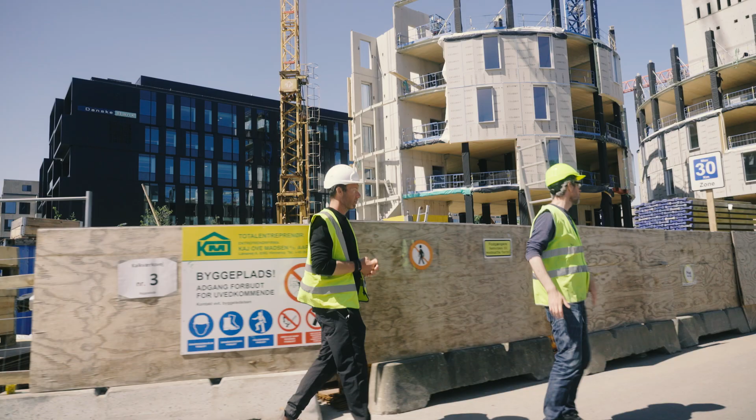Today, what are we going to take a look at? Today we are going to open our minds and hearts and embrace concrete. We're going to talk about how you use concrete for the most important parts of the building, and how you always think about bringing down the amount of concrete used.

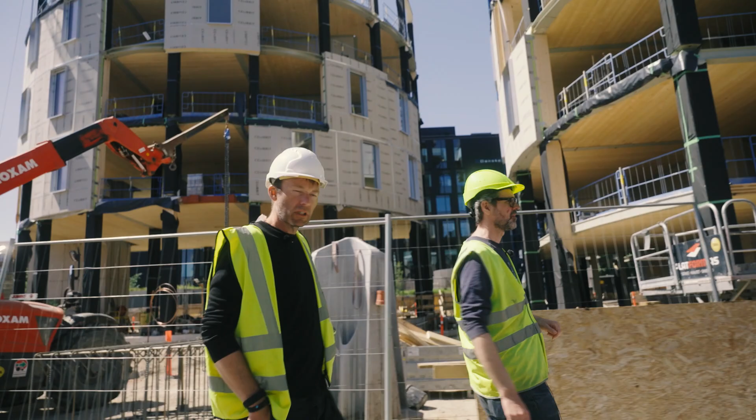Just a quick recap for the audience out there: why do we not like concrete, Anders? We don't like concrete because it stands for 8% of the total CO2 emissions globally. It's a big sinner. It uses so much energy to create cement, and that's a huge problem.

The other thing is that to make concrete, we are draining the oceans for sand, because it needs rough sand instead of round sand. People always think, why don't you take sand from the Sahara? We can't use that because it's too round—it's been rounded. Another issue is that the specific stones used for hard concrete are imported from Scotland or the north of Norway, not locally harvested. So there are many problems with that.

But let's go in and see how far we can go.

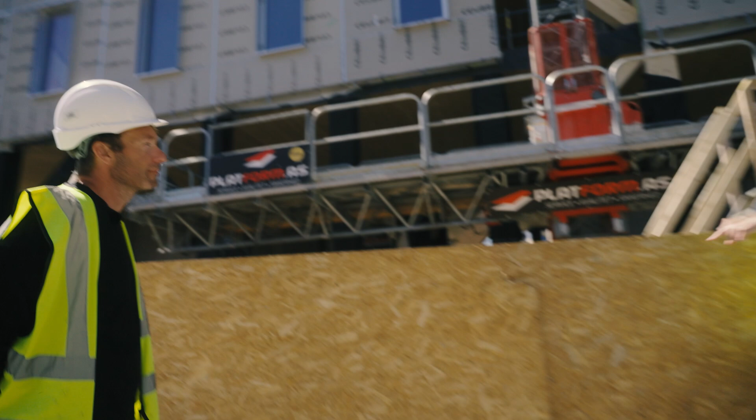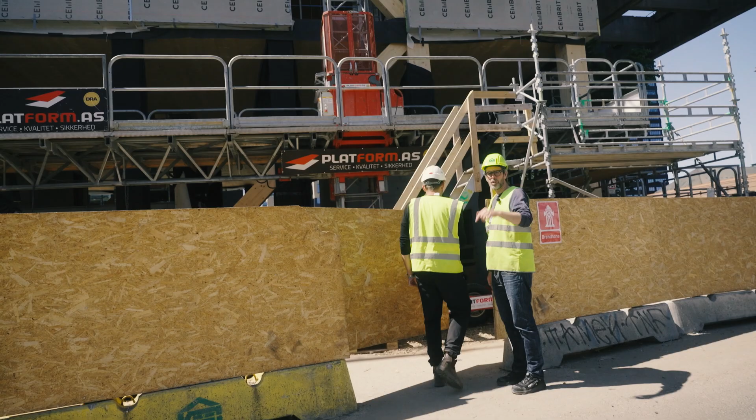I think you need to find a door. No, part of the problem is that we can't get in—there's no handle. Who would ever make a door without a handle? Do you consider a handle? It's an imaginary handle, you have to use your mind. The most sustainable architect in the world made a door—a sustainable door handle, the one that's never been built. Look at this! You are so clever, no handle here, not necessary, because the handle is over here. It must have been an engineer thinking that saves 50% CO2 emissions. Brilliant. Cut. Thank you. Only use a handle on one side, if not necessary.

So that's a way of talking about concrete in a positive way.

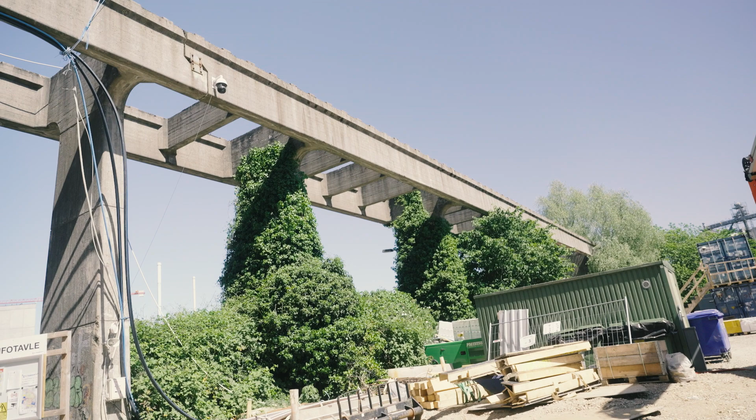Here, just next to the building, there's the coal crane—there's an old coal crane track from when this was an industrial area. The best thing about concrete is if you can directly reuse it. So this is going to be a bridge, and we are recycling all the concrete elements here. That's a fantastic possibility—it can be directly reused.

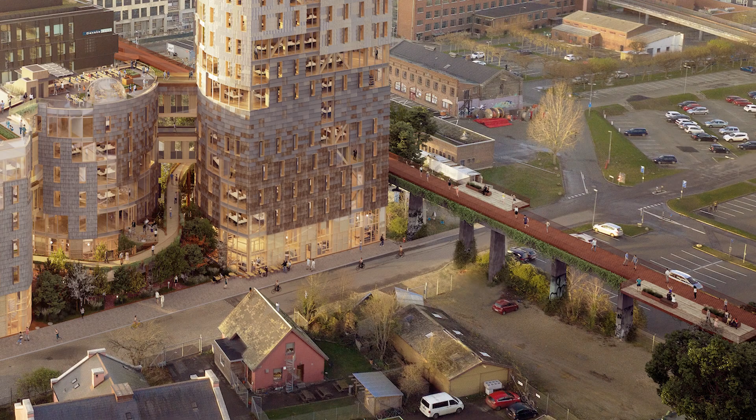And you actually won that assignment 7 years ago. 7 years ago we won that with a larger team. And you didn't know at that point that you were going to build this house? No. Life—life connects.

Okay guys, so we walk into this beautiful, wonderful building. So the first thing you did to try to minimize concrete, what was that?

Is that a helping finger? That's my helping finger, that's my pointing finger. So the audience doesn't notice that I'm trying to help you.

One thing we did to reduce the use of concrete in the building was to have no basement. Usually we dig the whole site out and cast a lot of concrete. Instead, we had no basement, no parking—we only have a small basement for bicycles.

So what we have to look at today is a different way to use concrete, or a new way that we are using concrete. Since concrete stands for 8% of total CO2 emissions, of course we need to find solutions.

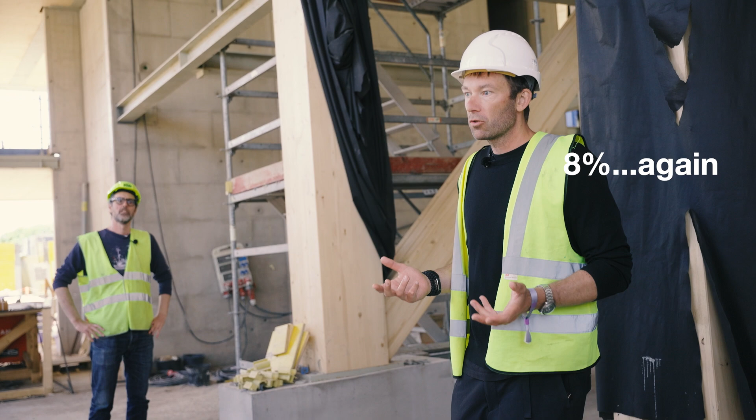One way of finding solutions is to make more sustainable concrete. But the first solution is to minimize the use of concrete. But we said that. Yeah, but we're saying it again.

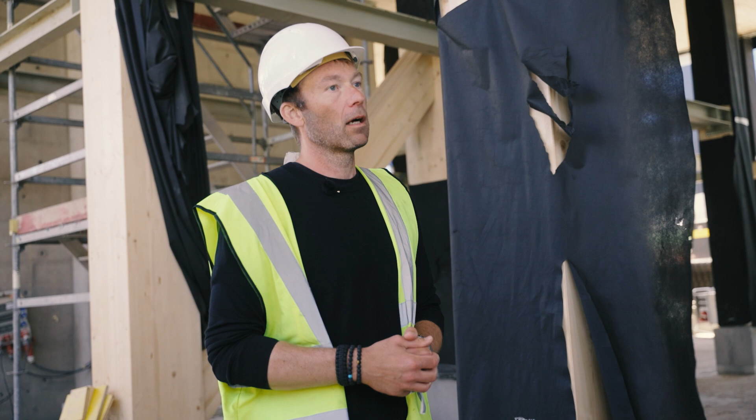So now let's go up and look at the top floors that are actually being cast right now. Dry cast? No, in situ cast. In situ cast, yeah—of course that's what it's called.

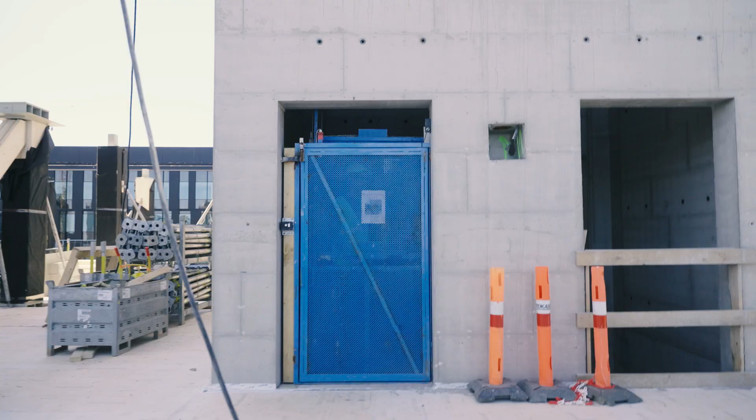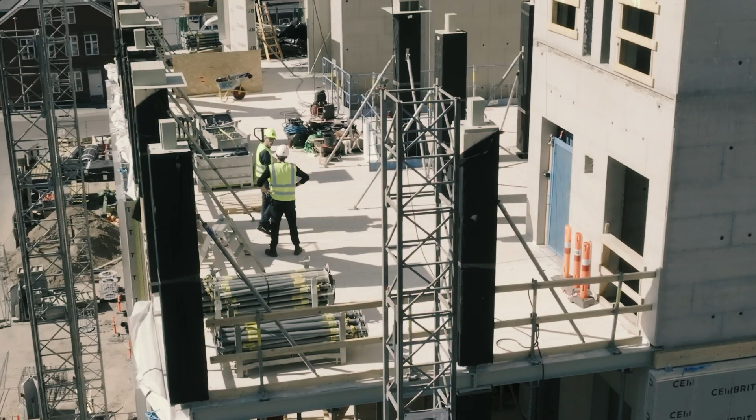So I don't know if you know it, Anders, but I used to do a lot of weightlifting. No, children's television. Nearly the same. Same, but different. Maybe we should start by looking at somebody else's way of building the old way.

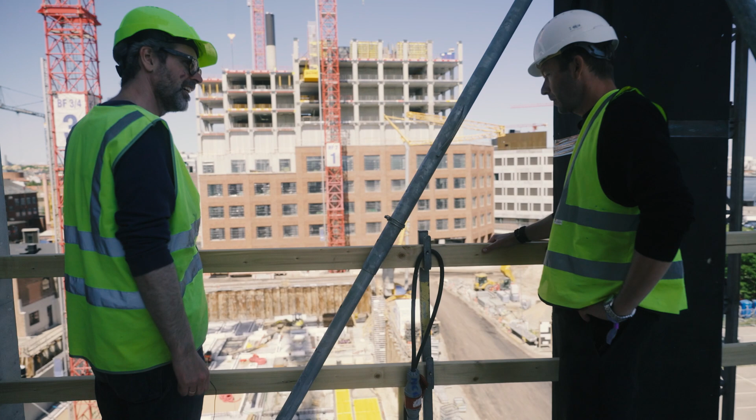Okay, so this, actually, it's a nice view. So what we're looking at here... Are you not completely afraid of heights? I'm a little bit afraid of heights, or a lot actually. Okay, I'm just gonna stay in here.

So what we're looking at here is a traditional dugout basement, which could be various depths, 2-level, 3-level, whatever. What happens that is not so good is that you dig out a lot of dirt and mud, and then you drive it away. There's a lot of truck driving to get rid of it. And then you hammer these steel walls in, which is really intensive in steel and CO2 emissions to create.

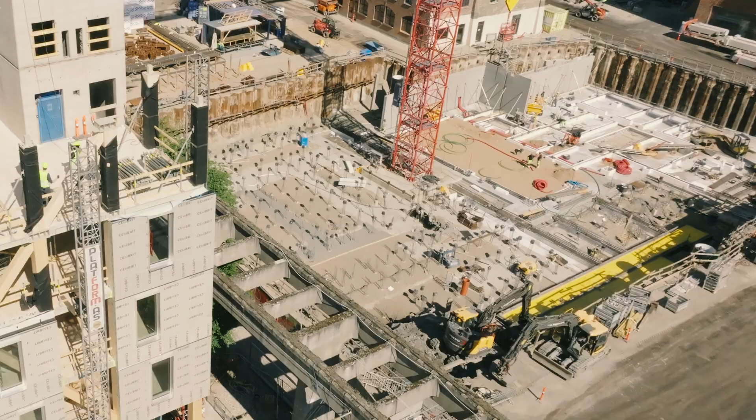So you're already in the negative, and we're not even starting to use concrete yet. This is actually really incredible that when we calculate CO2 with life cycle assessment, these two things, the steel walls and the removal of all this dirt, are not calculated in.

Where the calculations actually start is when we then have to prepare the concrete. And in that there is of course all the arming of the steel in the concrete, which we can see over there as well. The arming meaning all the steel rods that you bind together, so the cement has something to cling onto, so it can take the load. Okay, this is actually a bit unstable. Yeah, it's not so good.

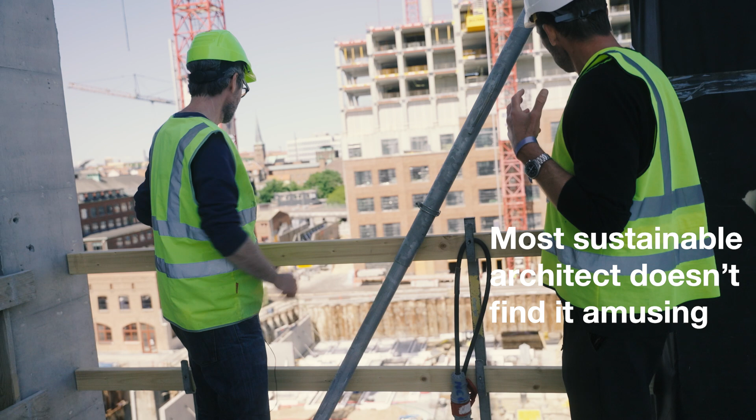Okay, but then you start to fill up the basement with concrete, and of course that is enormous amounts of volume you put in. Both the base, which needs a big deep anchor if you make a high building, so you start to use a lot of concrete there. And that's of course a super big challenge.

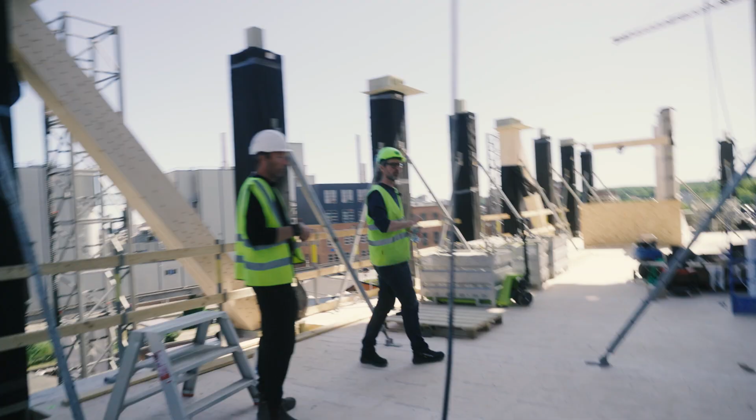The site that you choose to build on has an impact on sustainability immediately. And where we're actually building now is on a beach. This used to be the beach, and then it was claimed as an industrial area, and now after that we are making it into a new kind of office or residential area. So the foundation is basically on sand.

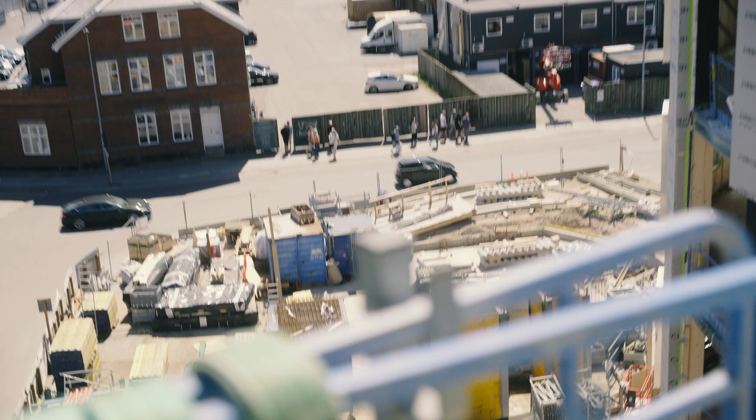Can we see some of the foundation points down over here, those squares down there? Yes, those are the anchoring points on this building. Now you can see where the containers are over there, that's the footprint of the third building. The interesting part here is that the buildings that are 6 floors high, and this building that's 20 floors high, have nearly the same amount of pillars, which is interesting looking at how many more square meters we're actually building, even though we're up high with a light building compared to a heavy building.

Let's get some comparison. Now we saw a traditional way of doing it compared to this one. The amount of concrete for foundation, what is that? What you can see here is that we've not dug out, well, we removed earth, but like a couple of meters or not even, 1.5 meters, something like that.

And then we put these vertical pillars in, and after that, cast a platform. You can see that there aren't these steel walls around here. No, so we didn't have to go down, and it's a retaining wall for the dirt that you don't need. It doesn't expand because the weight of this building is much lower than the one over there. So that's a very, very big difference where we don't use that much concrete.

What we've also tried to do here is that the concrete company, Aalborg Portland, has developed a new type of concrete that reduces the amount of CO2 in the cement production.

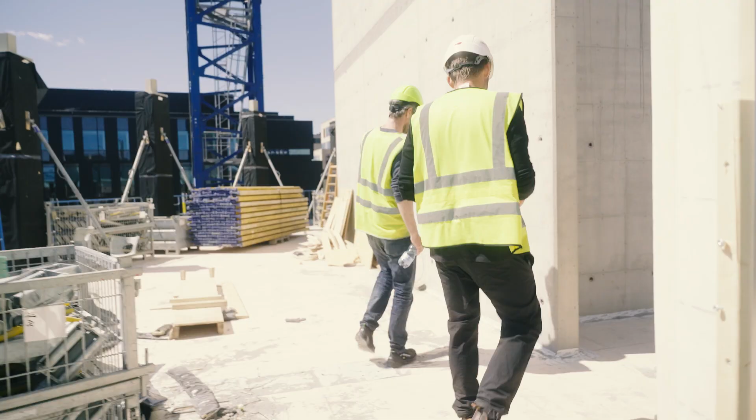Is that the same cement we have there as the one we have over here? Yes. So in building, there's two ways of building with concrete. In Denmark, typically we do elements. That means the columns on the side and the columns around the slabs are built up in a factory, then driven from the factory and assembled on site.

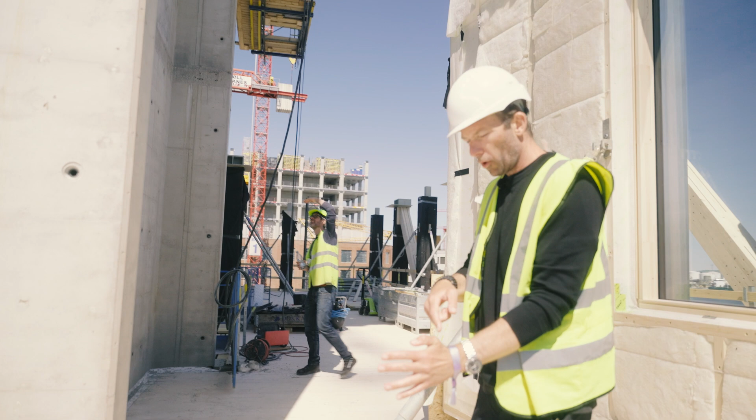And why didn't you do that with this one? There's different reasons for that. Here we have this form that's able to move up, almost like scaffolding on a rail or a train, where the whole top part can be moved up and follow the casting of the building. So instead of craning elements in, you start from the bottom, pour into the same form, lift the form up, and pour more. That's how you keep going.

But what is the advantage of that? Do they need more concrete to do that, or is it different? In some situations, in-situ cast in place makes it easier to optimize for the use of that part of the building. Where an element's advantage is that you do the same element many times, that also means it needs to be optimized for all purposes instead of being customized for that specific situation.

But for us here, we also have an aesthetic thing, that in-situ casted is a more beautiful form and shape, where you don't have joints. If it's an element, you start to have joints, and these seams are not very beautiful. So here we get a full casted wall and shape at the same time.

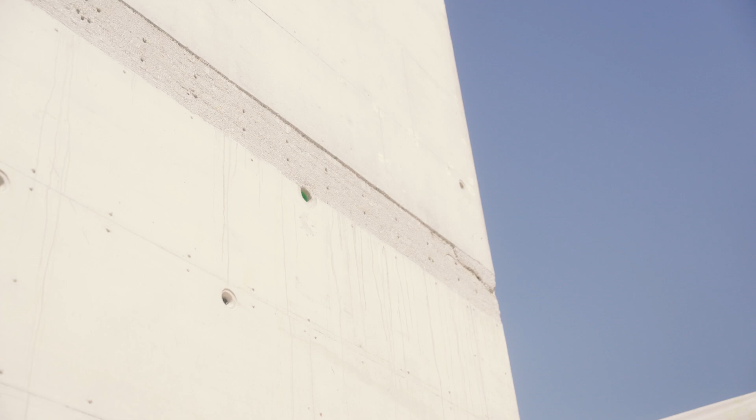So let's talk about the concrete. Let's be concrete. That's a good one, as you say in English. I don't know actually if you say it.

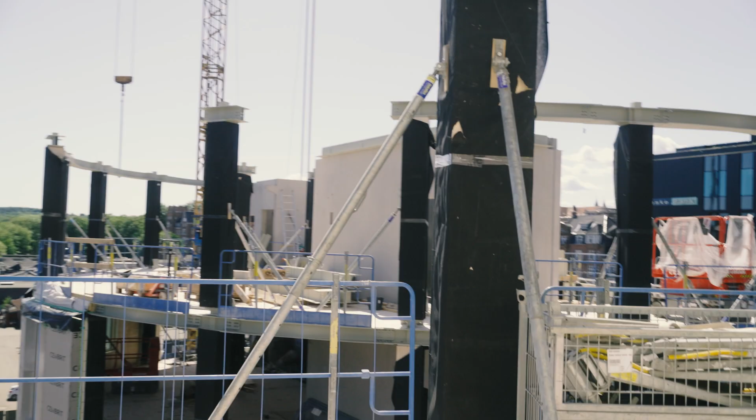So that building, is that the correct height now, or is it two stories more? That's one story more, and then there's the roof terrace where there's also a cafe on top. Oh, it's gonna be so nice. We're gonna sit in a future episode. We're gonna do the cafe episode, where I do a perfect latte for you.

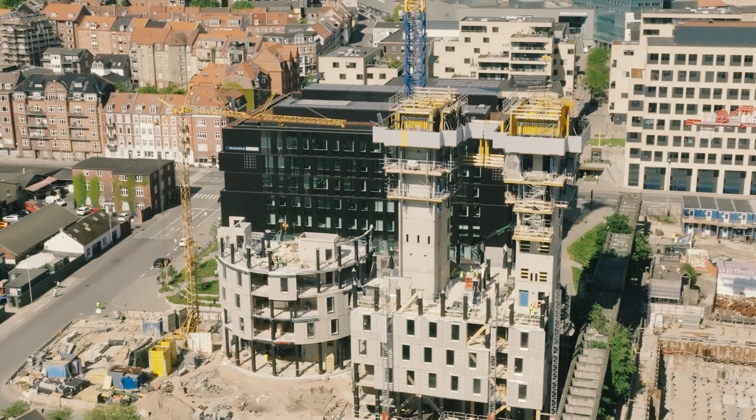We've covered in early episodes how much wood is part of the bearing structures and the wooden floors. What is the amount of concrete that you can leave out of a building like this? In this case, it's around 85% of the material that we leave out, in weight. If you would weigh this building, I believe it's around 13 or 15,000 tons, and it would have been over double the weight if this had been built in concrete. The fact that it's so much lighter is the volume of concrete we're leaving out, because that's the difference. So you have made a core of concrete.

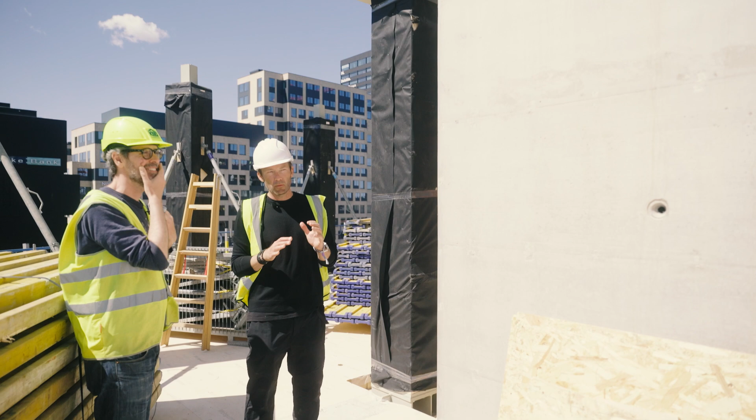There's some interesting things you can do. We've tried in another project to use waste concrete, crush it, and cast with that. We could see that we could save around 8% CO2 by crushing and then casting with the same amount of cement that we normally do. So just on saving stone, sand, and all the things you started by saying was a problem in harvesting virgin materials.

In this case, we're trying to create or use a new type of cement, and it's actually been an easy fix, because the concrete company has made this FutureCEM product, which reduces the CO2 emission in the fabrication of the cement. So basically it just means we're casting the way we always do, but with a different product that has a lower CO2 impact.

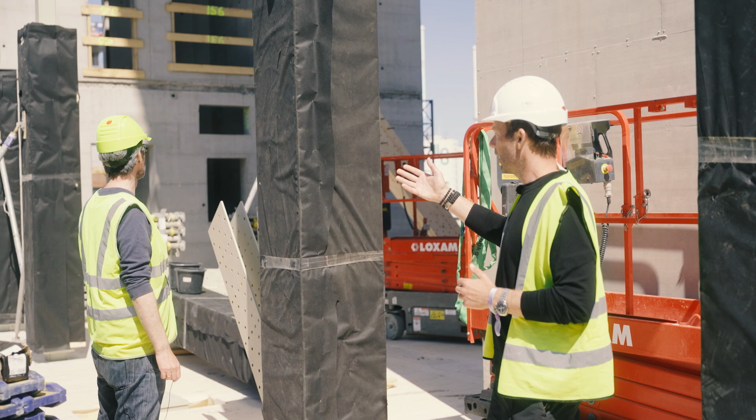They are promising you can save around 20 to 25% CO2, but that's really on the toughest concrete where you have a lot of cement, and we rarely have that type of concrete in buildings. So for our building here, calculating what we are using, we are saving around 10% CO2 on the concrete. It's not a lot, but it's a fantastic number. We have a lot of volume, and for sure it's making a difference.

One thing to say in terms of the most CO2 emitted from concrete production is the energy of making it. As we move to energy that is more electrified, or use hydrogen as a green fuel for fueling factories, that number will go down. There's an American company called Green Steel or something like that, where they're already using other ways of melting steel, and the CO2 reduction is enormous. It's a very interesting point.

The question is, with that statement, is it okay to use as much energy as you want, just as long as it's sustainable? I think that's important because, in my opinion, what we have to do now is build and use material that uses as little energy as possible. Of course it's good that we can start having renewables and other ways of creating this energy, but we must also accept that objects or materials that need so much energy is something we should go around.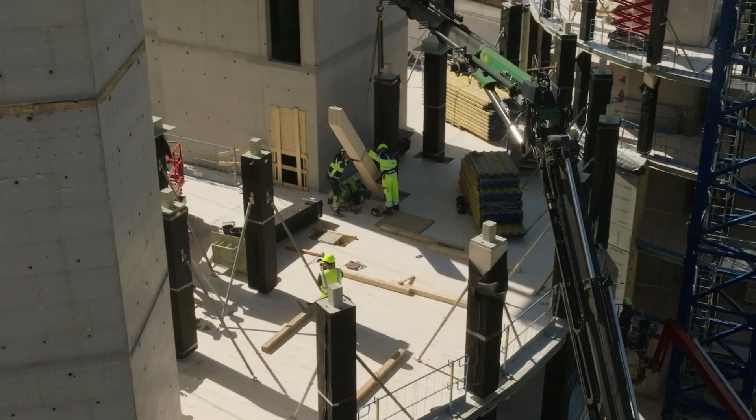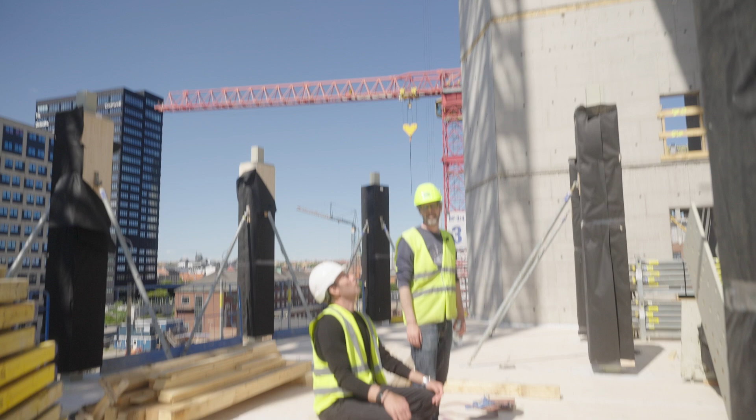Yeah, and I think for this building, where you can see that you have used these... Are you getting tired? Okay, great, so next time we do. But it's such a beautiful view. But it is actually very beautiful. It's not gonna look like that, but it looks really awesome from here. But it also looks like you're a very old man needing a nap. Yeah, in the middle of the episode. Exactly, okay so...

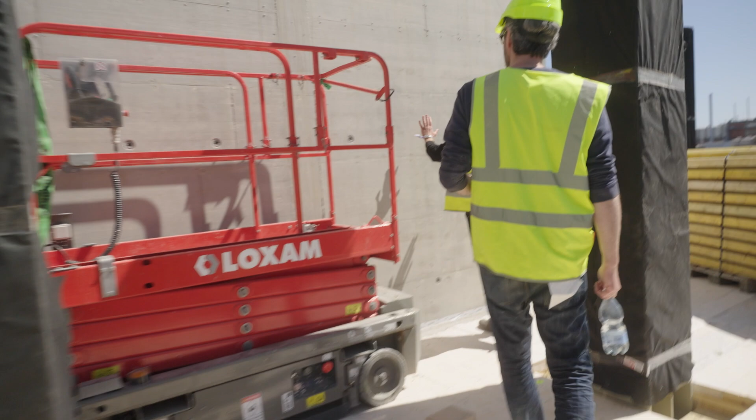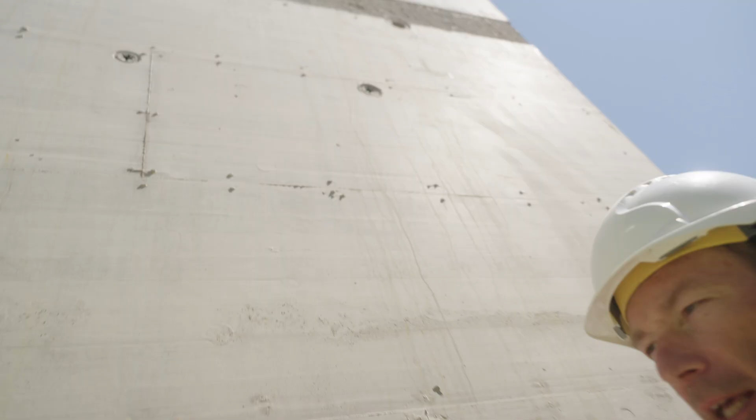For many years, architects have just loved this surface. The whole modernism, everything was out of concrete. We loved that it was possible to build large buildings, complex structures and spans, and get this surface. So it's also a mindset change, an aesthetic one. Now wood is hogging the appeal, and all of a sudden this is the bad guy surface that we don't like. But for the past 50 or 100 years, this has been a symbol of high-end architecture. It's a mind shift change that all of a sudden we conceive it differently.

What we found out when we had the conversation with the developers about wood, and I'm really not exaggerating, you seriously want to hug these wooden beams. I know it sounds stupid, but it's actually something that makes you connect to a building in a new way. I think the aesthetic and the feeling in buildings is going to change that way. We're going to see concrete as the past, something necessary but not something we want. And we're going to see wood as our new symbol of a future we need to change if we want to continue to be human.

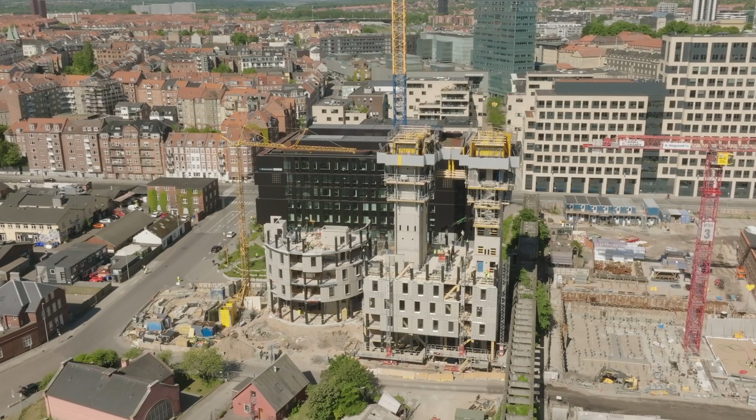It's because of that knowledge, we're learning more. People learn more about what the impact of different types of materials are. So when they look at concrete, they see something that's emitting CO2 or using energy. When they look at wood, they see something that symbolizes nature. It brings down their pulse. Now we're looking at a black box.

So, you should ask me: is there a future for concrete? The world's most sustainable architect in the world. Most sustainable architecture, yeah, that's nice. That's a good thing.

You feel motivated by that one. Most sustainable architect in the world, Anders Lendager.

Is there a future for concrete? No. But there is a way of rethinking concrete, so there could be a meaningful way of using it. So we should use concrete in the places where we don't have any other alternative.

We did an analysis of that, and we call it the concrete pyramid. It's kind of like the food pyramid, right? Made out of concrete. You shouldn't eat it, it's just a way to understand it.

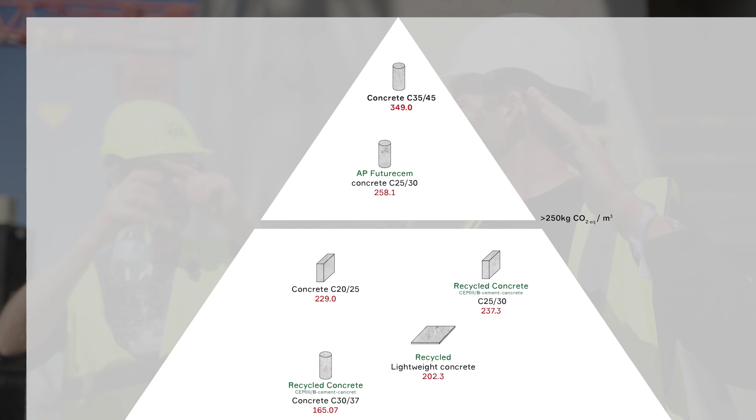So in the top, what do we have? In the top, we have the stuff we want the least of. That's the concrete we need for parts of the building that need to be super stable, for instance our ground floor here. You need foundation in the ground, there's no alternative for that.

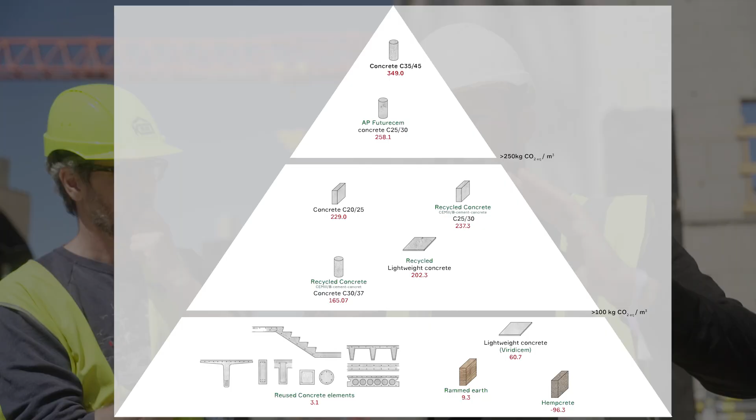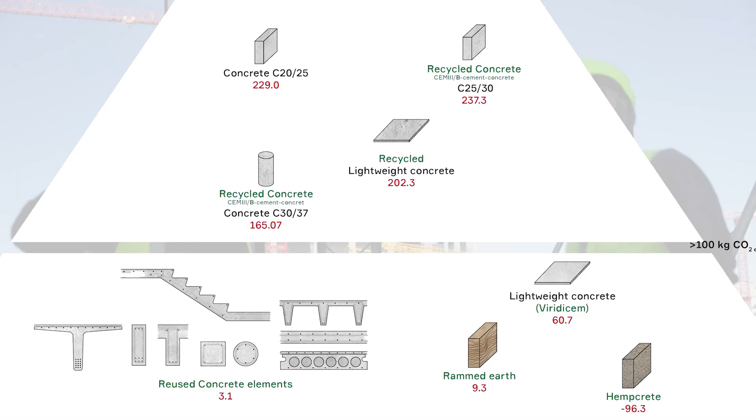When you go further down in the triangle, there starts to become alternatives, both new types of cement or concrete, but also the fact that you can disassemble the concrete. So we need to build buildings where you can take the parts apart and disassemble them afterwards, so when a building is not in use, you take it down and use it for something else. That's in the middle, and then you start to have a building that has almost no impact.

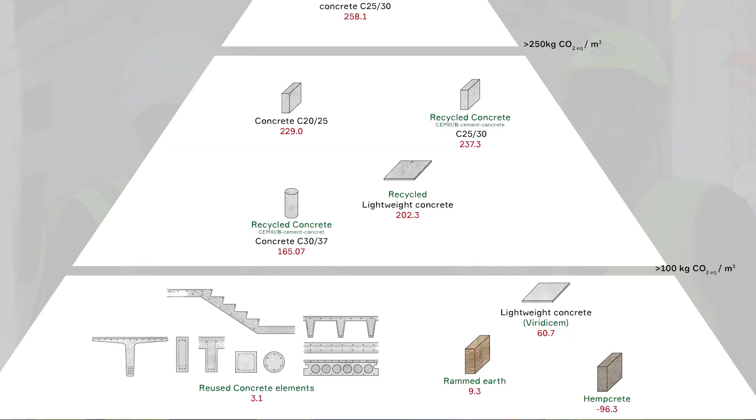When you directly reuse concrete, you use only 2 to 5% of the CO2 emissions compared to casting new. In the bottom of our pyramid, I'm at the bottom of it, you have all the pieces, staircases, all the parts of a building that are light and can be moved, inner walls, all of that stuff. That's also something that can be designed for disassembly and reused again and again.

So it's an overall material pyramid, right? No, it's only concrete. It's a concrete pyramid. But I shouldn't have said food, because then you think of it differently. I could say the oat milk pyramid, would that have greens in it?

So what you're saying is, in the bottom, everything made in the interior that's made out of concrete should be able to... maybe he looked at his watch like, okay, how much time do we have with this idiot? Tell people about the bottom. Maybe a power nap is needed. No, you had a power nap. Tell us about the bottom of it. I did, but I interrupted you so people didn't get it.

So the bottom part of the concrete pyramid, which is only concrete from top to bottom elements of the building, is staircases, parts of the building, inner walls, salt and pepper shakers, if they're made of concrete, that can be moved and that are flexible, disassembled, that you can set up again and again.